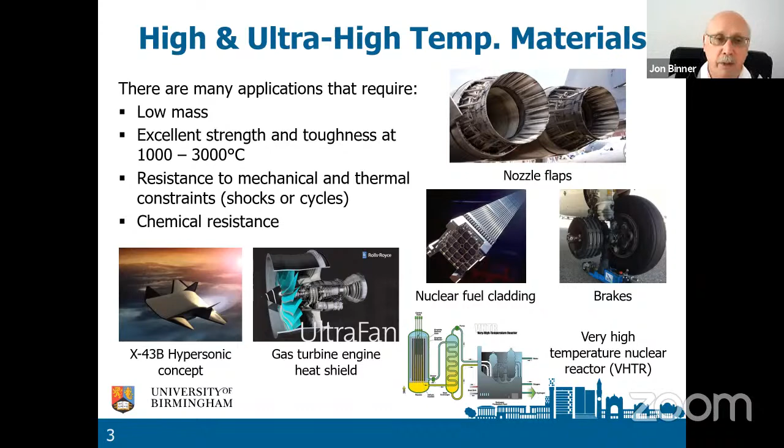So we know it's 2021, we know that some materials already exist. So the questions that need answers are: is it going to be possible to take existing materials and then improve them so that we get the right strength and toughness and resistance to oxidation and so forth at these high and ultra high temperatures? Or do we need to develop completely new materials? So that's the first question.

When we've answered that question, we need to ask ourselves the second question. Can we make components? And if we can, is their behavior representative of the inherent material properties? It's one thing to make a piece of ceramic or material in the laboratory that measures 1 or 2 centimeters in size; it can be quite different to make a full component. Can we get the properties that we can get in the small lab size samples? Can we achieve those same properties in the components?

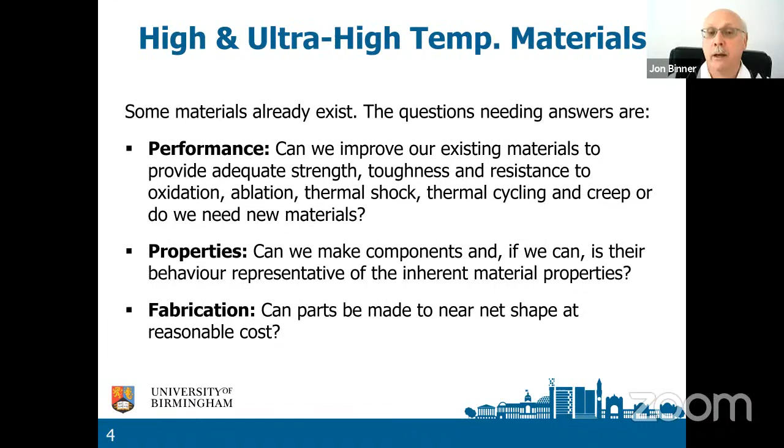And then the third question, and this is a question we need to consider all the way through the research: can we make parts at a reasonable cost? There is no advantage in having the most fantastic material ever developed by human beings if nobody can afford to use it for anything. So we really need to make sure, as we're developing the answers to the first two questions, that we keep an eye and bear in mind, is this going to be something that can be done at reasonable cost? Will people actually use the materials at the end of the day?

Okay, so the actual talk itself is divided into 4 parts, not of equal length. In the first part, I will look at oxide CMCs, ceramic matrix composites. These are materials which are typically used to around 1000 to 1200 degrees centigrade. So these are the lowest temperature materials that we're looking at.

Then I will move on to look at the silicon carbide based ceramic matrix composites. These are capable of operating somewhere in the range of 1300 to 1500 degrees centigrade.

And then we'll finish off by having a look at the ultra high temperature ceramic matrix composites. These are intended for use at 2,500 up to 3,000 and possibly even beyond 3,000 degrees centigrade.

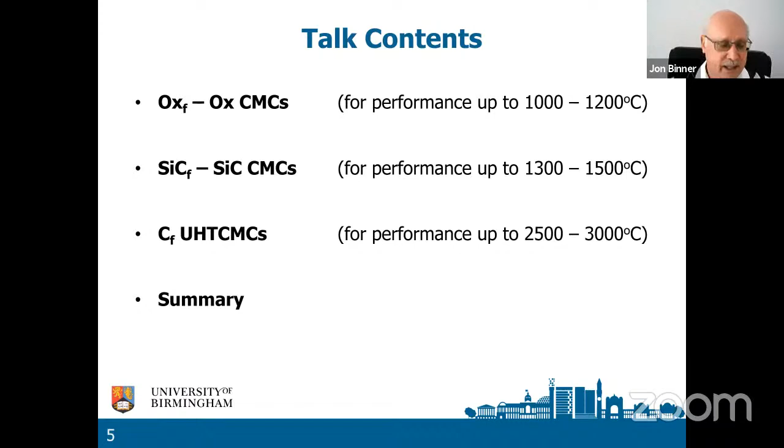You will see that there are some similarities and some differences in terms of how we go about doing things and what we do. At the end, I will provide a summary, and then we can have a session, hopefully, with some questions from you. So let's begin with the oxide composites. These are known as ox-ox composites: oxide fiber with an oxide matrix.

We have a number of projects currently in my team which are focused on these materials. Our focus is on how to make them, the processing of the CMCs. You'll see that that is pretty much our focus with all of the work we are doing. We are a team who very much focus on how to make the materials.

We're also looking very much to develop multifunctional properties, and we're looking at these with a number of different partners, different projects with different partners. In the UK, these partners are Rolls-Royce, BAE Systems, and DSTL. DSTL is the Defence Science and Technology Laboratory, and it's part of the military.

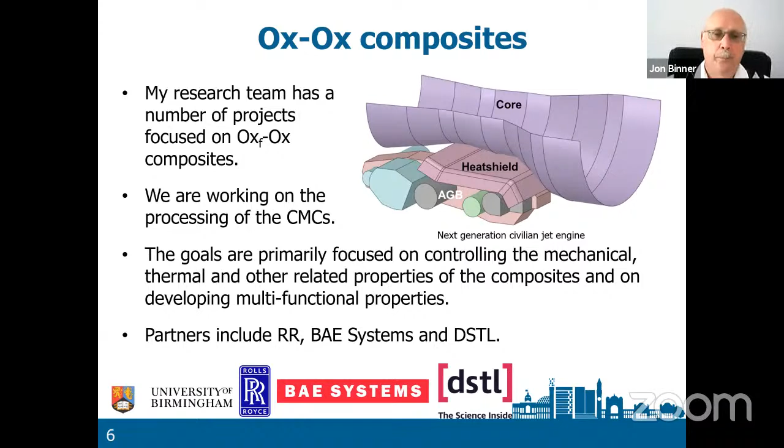Before we go any further, I really want to make one thing clear to you, and that is there are different types of ceramic matrix composite. These different types come about from the different mechanisms we use to achieve the toughening effect that we get in these continuous fiber ceramic matrix composites.

One thing we can do is put a fiber coating on the fibers. What that does is create a weak interface between the fibers and the matrix, and these are known as weak interface CMCs. It's one way of making CMCs, and it's actually the preferred way of making CMCs. You get the CMCs that are strong and tough, and that's exactly what we want.

However, it's not possible to do that with every CMC system. So an alternative approach is you create a very porous matrix, and that gives you a weak matrix. Again, you get the toughening effect, but now the composite is much weaker. So you have a tough but weak composite, which is less desirable than the weak interface where you have a tough and strong composite. But those are the two primary approaches, so you will hear me talking about weak interface composites and weak matrix composites.

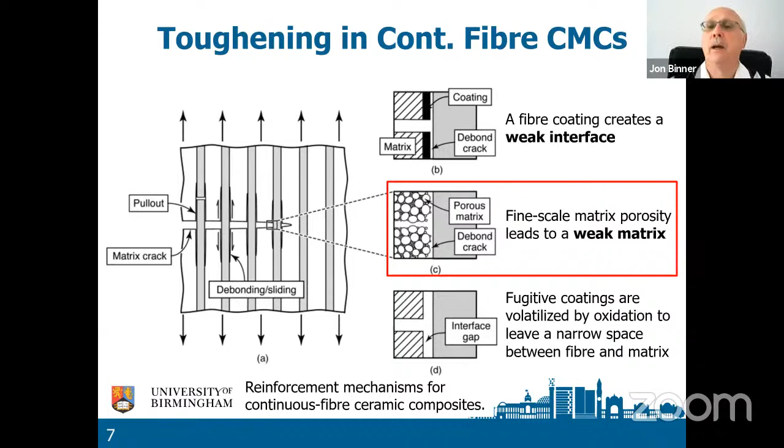For the oxide-oxide composites we are talking about, these are weak matrix composites. So we're going to focus for the next few slides on weak matrix, oxide-oxide systems. The goal here is to make ceramic matrix composites based on alumina or another oxide, mainly on alumina fibers with a porous alumina or another oxide matrix. So they are oxide fiber, oxide matrix composites, and most of our work and most of the work in the world is based on alumina.

What we are looking at is several different processing routes. There's more than one way to achieve that, so we are looking at different routes and working out their advantages and disadvantages, so we can work out for each different application which is the best route to use. The key requirements are how easy it is to form the shape, how homogeneous is the product, what is the final density. Remember, these are weak matrix composites, so we want a low final density. And then the final properties: how tough are they, how strong are they, and so forth.

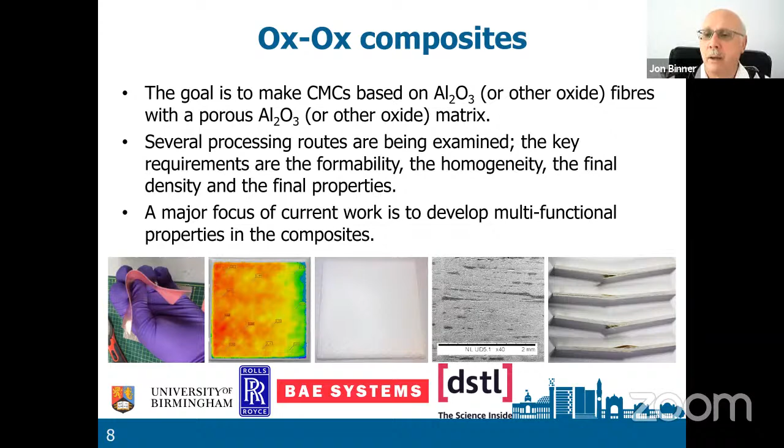Recently, at the end of last year, we started a major new program funded by the European Commission as part of its Horizon 2020 program. It's led by the University of Pisa in Italy and involves 13 academic and industrial partners from a number of countries. The University of Birmingham is involved. The key goal is to learn how to reduce the costs for making ceramic matrix composite components and their use in energy-intensive sectors such as steelmaking - we're using these to try and improve the energy performance of other industries.

The majority of the work going on is on silicon carbide composites, but our role at the University of Birmingham is slightly different. We are investigating oxide-oxide CMCs, and in particular, what we're looking at is the potential to actually make weak interface oxide-oxide composites.

I said earlier, the oxide-oxides are generally weak matrix, and there is a reason for that. Back nearly 25, 30 years ago, in the 1990s, oxide-oxide composites started to be developed. People were unable to make weak interface oxide-oxide, so they developed the weak matrix. What we are saying is that's fine, but that was 25 years ago. Maybe there are some ideas out there now which didn't exist in the 1990s that allow us to think we might be able to achieve what has been regarded as impossible - to create good weak interface ox-ox composites. So that's our target.

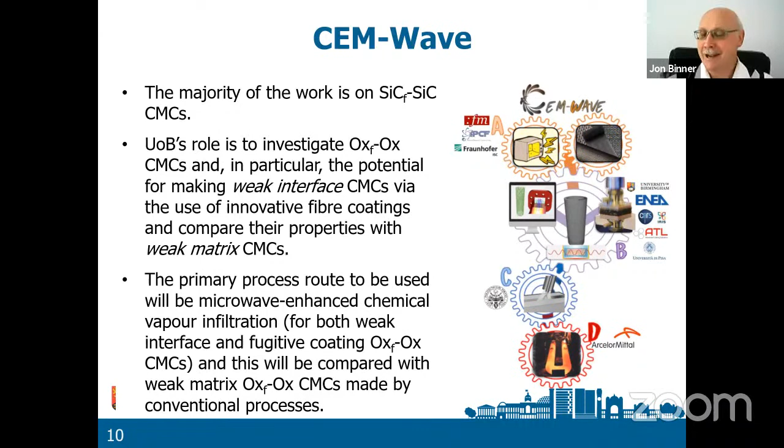So by the end of the program, which is 4 years long, we should have a very good idea that either, no, you still cannot make weak interface CMCs, or yes, you can. Here are the properties, and this is one way of making them.

Okay, so that's all I wanted to say about oxide-oxide composites. Obviously, I've got 3 different types of composites to get through, so that finishes off the work on oxide-oxide. Now we are turning our attention to the higher temperature materials - the SiC-SiC composites, silicon carbide-based composites, and also the ultra-high temperature CMCs, known as UHT CMCs.

With both of these types of CMC, you can have at least 3 different approaches. You can use stacked layers of fiber fabric, that's 2-dimensional or 2D. You can take those stacked layers and needle them - that's when you push a needle through the layers, and it picks up individual fibers and pulls them from one layer to the next. So you end up with something in the Z direction.

The stacked 2D are all in the XY plane, while the needled have a small amount of fibers in the Z direction. And then you've got the truly woven 3D fiber preforms. The stacked 2D are the cheapest, the needled are a little bit more expensive, and the woven 3D are a lot more expensive.

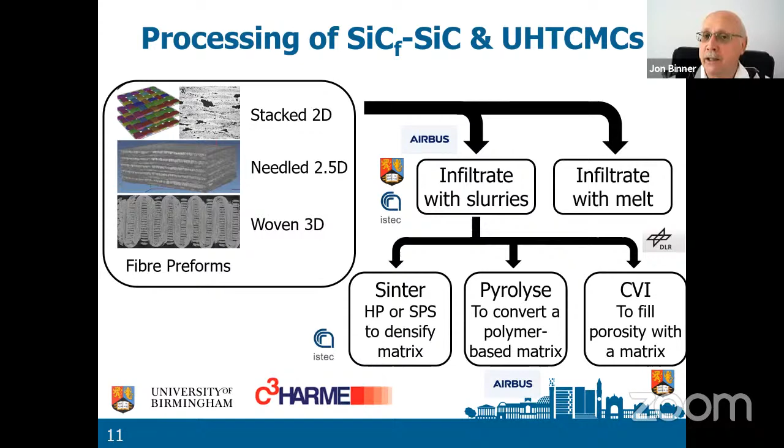But the same concepts and exactly the same processing techniques can also be used to make SiC-SiC composites. So we've got the three different types: the 2D, the 2.5D, and the woven 3D.

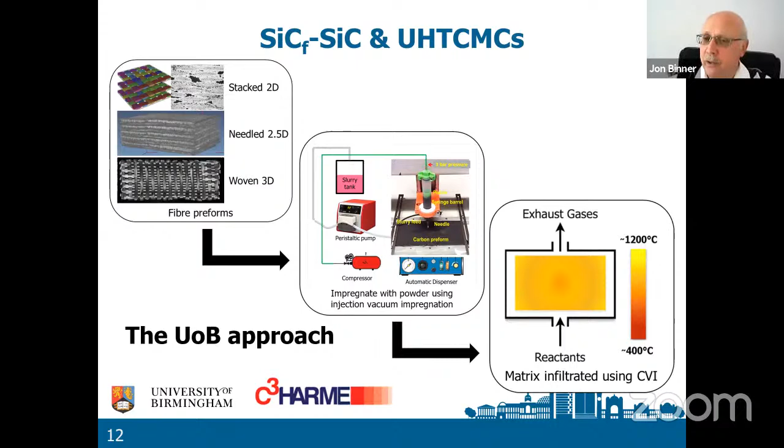Then if you want to impregnate with a slurry, we developed at Birmingham a process known as injection vacuum impregnation. I will describe that process to you a bit later on in this talk. And then you use your chemical vapor infiltration, which I will also explain a little later in the talk. In fact, here it is.

Chemical vapor infiltration is a process in which a solid matrix is deposited in a porous preform by the thermal decomposition of a reactive gas mixture. So you pass a gas at high temperature through a fiber preform, the gas breaks down and deposits a solid. You can see three different chemical reactions there.

Methane breaks down to give you carbon. A rather nasty gas called methyl trichlorosilane breaks down to give you silicon carbide. And zirconium chloride, together with boron chloride, breaks down to give you zirconium diboride. There are many, many other chemical reactions that will also work.

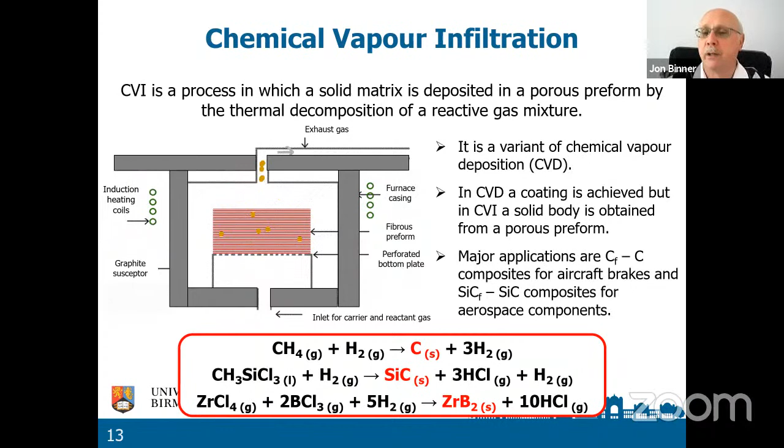The process is a variant of chemical vapor deposition, which more people have heard about. In CVD, you get a coating, but in CVI, you get a solid body from a porous preform. CVI is a commercial process — it's how carbon-carbon brakes are made for commercial aircraft. This is the process by which aircraft brakes are made, and also aerospace components are made out of SiC-SiC composites using the same basic process.

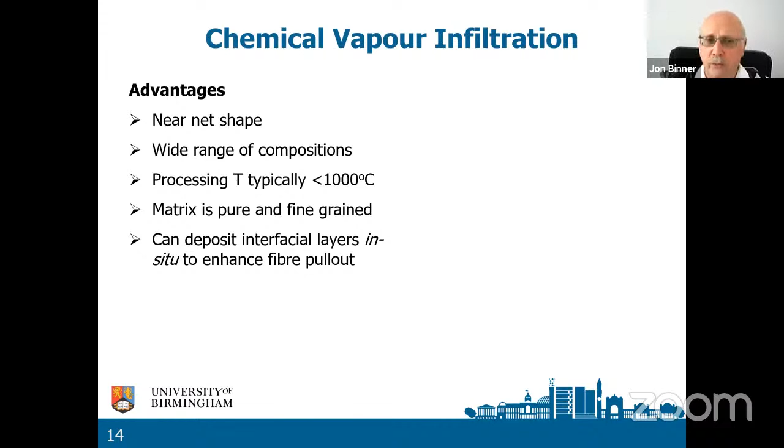The advantage is it's a near net shape process. There's a wide range of compositions. The best part is that the processing temperature is typically less than 1,000 degrees centigrade, meaning you don't risk damaging the fibers. The matrix is pure and fine grained, and in situ, in the process itself, you can put different gases through — so you can start by depositing an interfacial layer, then change the gas and deposit a different matrix. These are all very good advantages.

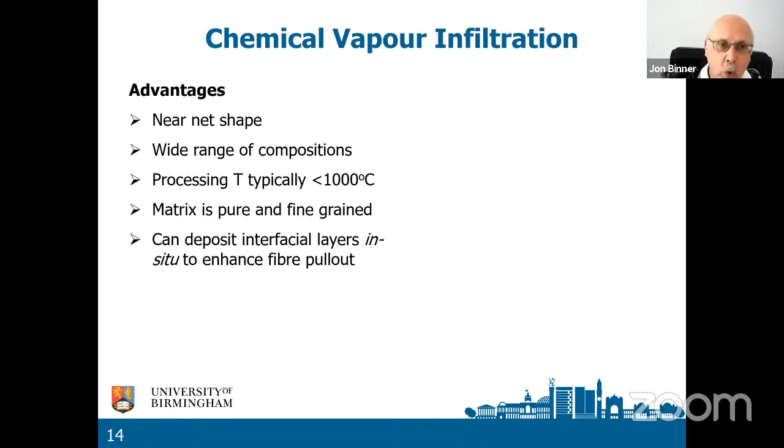There are some disadvantages. The conventional process — isothermal, meaning same temperature, and isobaric, meaning same pressure — is very slow. What do we mean by very slow? We mean that making each component can take about 1,000 hours, which is about 3 months of processing time.

That is slow. Now, you don't make your components one at a time — you have a very big chamber, and there you can make a large number of components at the same time. But it is still slow.

Why is it slow? If you look at the little diagram, the sample is the thing that's red, and the color is deeper in the middle — in other words, it is hottest at the surface and coolest in the middle. So when you pass your gases through, they tend to break down and deposit on the surface, and this blocks off the channels, the pores that lead the gases to the center of the body.

So after a number of hours of processing, you stop the process, take all the parts out, machine the surface, then put the parts back in and reheat the whole thing. Heating has to be very slow because we want to minimize temperature gradients. Then you go through the whole process again, and you might have to do the machining stage two or three times. So the whole process can easily take 1,000 hours, or about 3 months.

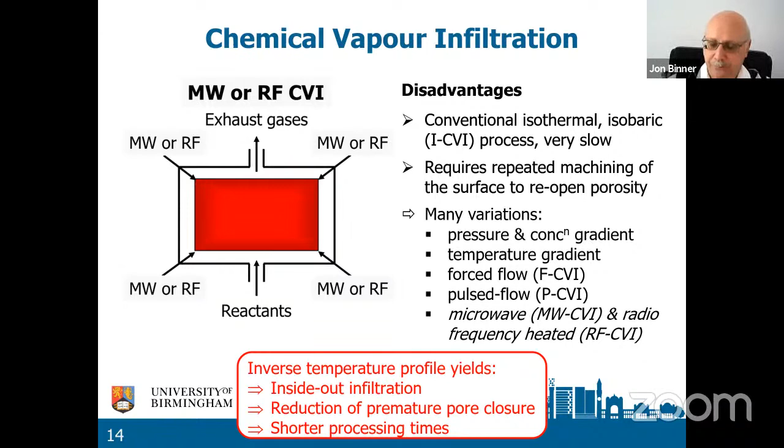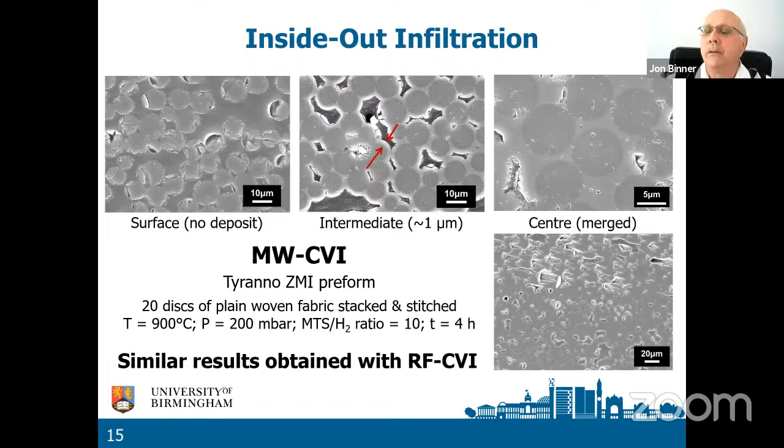So this enables us to cook from the inside out. We can avoid all those machining stages. We get much faster processing. And we can see the deposition profile here.

So this is silicon carbide fibers with silicon carbide powder and a silicon carbide matrix. What we are doing is taking the fiber preforms, infiltrating them with powder, and now depositing the matrix. You can see when we heat it at 900 degrees centigrade, we get a nice inverse temperature profile in the middle, that's the area circled in red.

At 950, that profile is larger, and by 1000, we've completely cooked the entire sample. Ignore the ends with the green circles.

This is because we painted the ends of the samples with a silicon carbide slurry, and that was because we were getting electrical discharges where an individual silicon carbide fiber poked out of the edge of the sample. We built up the electric field in the microwave, and then just like lightning strikes, we got discharges. We found by painting the ends of the sample, we could avoid that.

So ignore the bits in green, it's the bits in red. Again, what you can see here is that you do indeed develop the inverse temperature profile. So it's nice to see that the theory actually is matched by experimental practice.

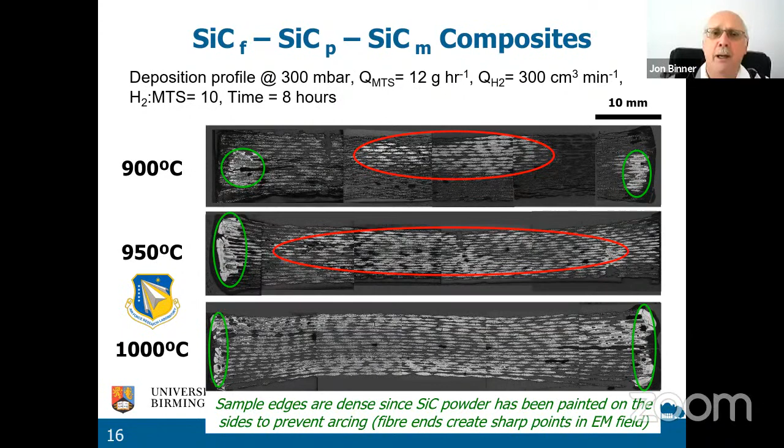You can see here, these are the samples at 1000 degrees centigrade. The time is 8 hours. The center line is at 0 millimeters, and there's very little deposition. But as you move towards the surface, you get more and more deposition. So again, we're able to see from our samples that this whole inverse temperature profile works very, very nicely.

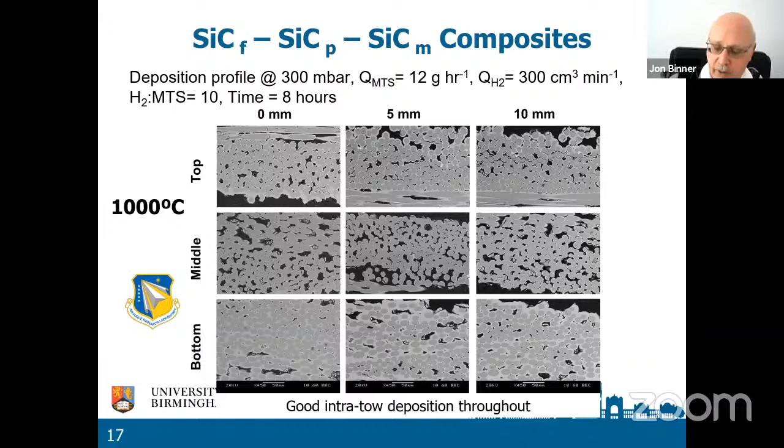And then we can check the rates. On this plot, on the left-hand axis, you have got the mass gain rate, and the bottom axis is the pressure of the system. You can't operate at very, very low pressures because you get plasma discharge. If you operate at slightly higher pressures, you encourage arcing, but anything above about 150 millibars, we can operate successfully.

And then you've got the plots at 900, which is roughly equivalent in deposition rate to conventional CVI. If you move to 950, you get faster deposition. And if you move to 1000, you get faster still. Note that data point that is circled, that's only had 5 hours rather than 8 hours. So after 8 hours of processing, we would expect it to be a little higher up that axis. That's an experiment we still need to do.

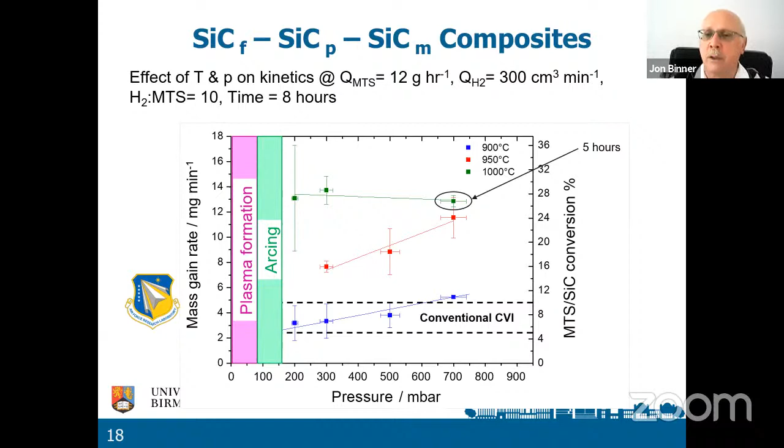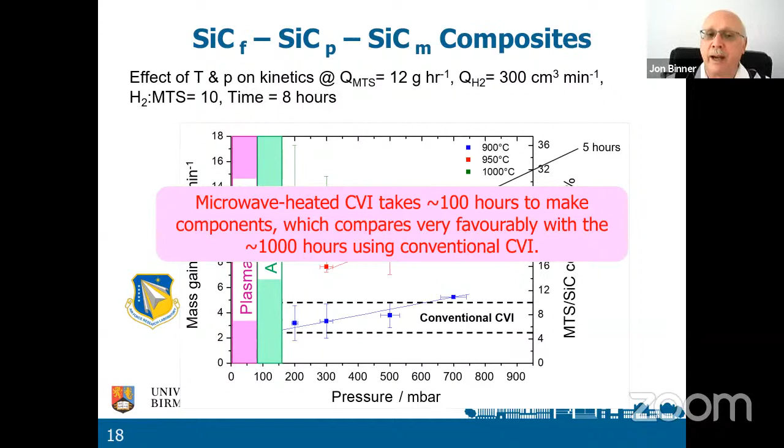So microwave heated CVI takes about 100 hours to make components. That compares very favorably with the approximately 1,000 hours using conventional CVI. So we've speeded the process up by a factor of about 10.

Most recently, we started a new program on using microwave CVI to produce hollow silicon carbide tubes, and this is for nuclear fuel cladding. So we wind our own tubes, as you can see in that top image, and our partner is the National Nuclear Lab. We've got funding from the UK's Department for Business, Energy and Industrial Strategy, known as BEIS. It's part of a bigger program involving other universities, as you can see from that bullet point, the bottom bullet point. But what we're working on is saying, well, so far we've only made discs or plates of material.

Can you actually make a hollow tube? The answer is yes, you can. We haven't finished the work yet, it's still ongoing. But you can see how with deposition time, after just 20 hours the density is going up very nicely. You can see the estimated time to different densities depending on whether we're getting 0.1 grams per hour or 0.05 grams per hour. Since we know we can get 0.1, we're going to be 40 or 50 hours to make these samples. That's a long time, but it's a lot better than 1,000 hours.

That concludes what I wanted to say about SiC composites. We're roughly halfway through the talk, so I wanted to spend the rest of the time talking about ultra-high temperature materials. These are materials needed to withstand really very high heat fluxes over very small areas, so you're going to get very high temperatures, oxidation and erosion, and very, very high temperature gradients.

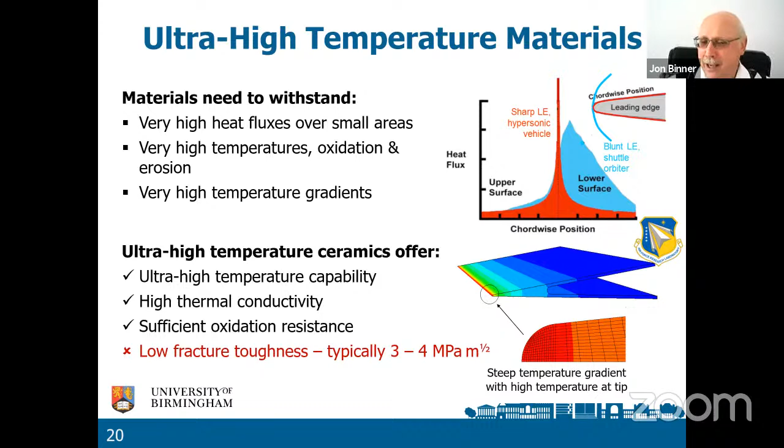So the materials we're looking at are ultra high temperature ceramics. They have the ultra high temperature capability, a high thermal conductivity which is very good because it helps dissipate the heat, and adequate, sufficient oxidation resistance - it would be better if that was better, but it's okay. The big disadvantage of these materials is they have a very low fracture toughness, 3 or 4 megapascal meters to the half. That's about the same as alumina, and that's just not good enough.

This is some work done in Italy, a few years ago now - this is 10 or 15 years old. They made a nose cone for a rocket, at the tip - just that little silvery bit right at the tip in that top image - made of zirconium diboride containing silicon carbide. Then it was tested. If you look closely at the time, 15, 12, and 57 seconds, within a second that whole nose had completely failed. So it didn't survive a single second.

So that tells us that these monolithic ceramics, not the composites but the straight ceramic material, simply cannot cope with the temperature gradients that are generated.

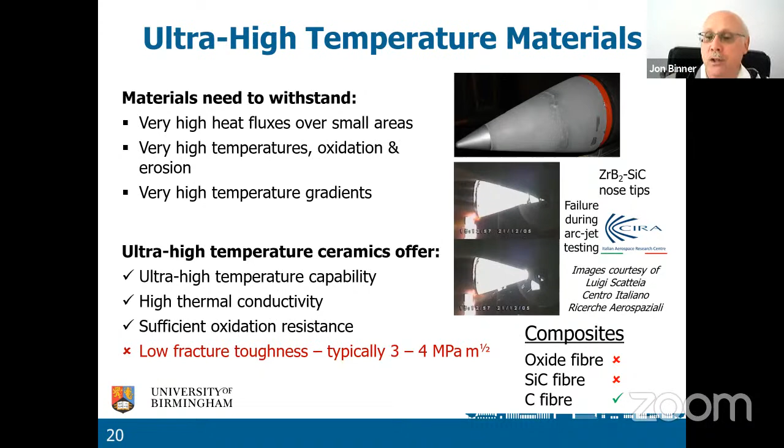So the solution is to use composites. We can't use oxide fibers - they won't survive more than about 1,000 or 1,200 degrees. We can't really use silicon carbide fibers - they won't withstand more than 1,400 or 1,500. We can use carbon fibers, but they oxidize readily, so we've got to protect them from oxidation.

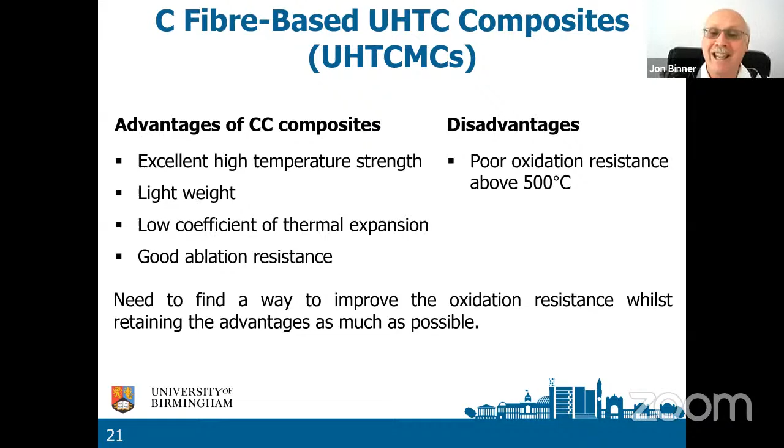So the carbon-carbon composite has excellent high temperature strength. It is very lightweight, has a lovely low coefficient of thermal expansion, and excellent ablation resistance, but it has extremely poor oxidation resistance above 500. And we want to heat these materials to 2,500 or 3,000 in air, so we need to find a way to improve the oxidation resistance.

But let's just have a little look at the slurry impregnation stage. This is something that we developed at the University of Birmingham.

Originally in the laboratory, we used vacuum impregnation, and it worked extremely well for small samples. But as soon as we started to make our samples bigger, we found that vacuum impregnation didn't work. You got that very shallow depth of penetration. These are X-ray micro-CT, micro-computed tomography images, and you can see how only the surface layers have got the material deposited.

So we needed to find a new approach. We developed the injection vacuum impregnation, which we know as IVI. You take a syringe full of your slurry, plunge the syringe into your preform, and then as you withdraw the syringe, you squeeze the slurry into your preform. So now you're able to fill the preform from the inside with your slurry. And it works beautifully.

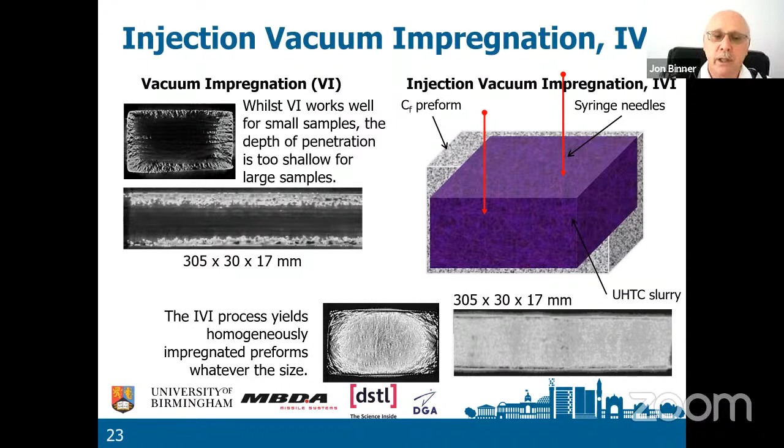You can get very, very homogeneously impregnated preforms, and it doesn't matter what the size is. You can have a look at these things, and we shall see shortly, and you can make really large plates. The other big advantage is you use less processing steps.

With the old vacuum impregnation, you needed 8 different processing steps, and you can see the mass change there with each processing step. First PYR is first pyrolysis, and then second pyrolysis. The red shows the IVI approach. It takes just 3 processing steps: injection, impregnation, pyrolysis, and you've finished. You end up with something which is much denser, it's taken many less processing steps, so it's a much, much better route.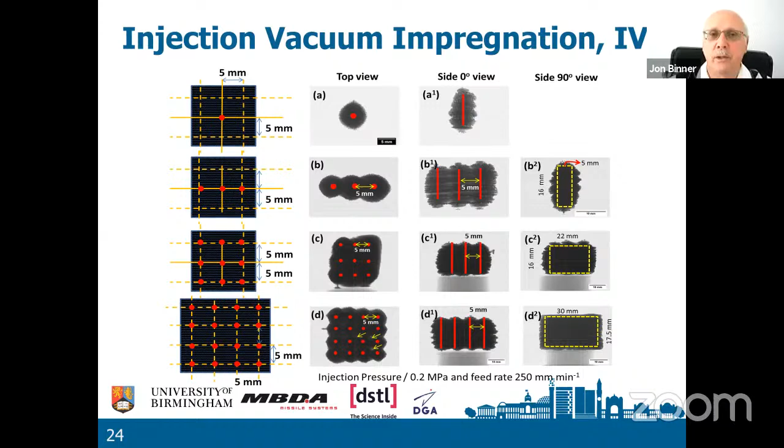Since we did this work, we've had an entire PhD work on this to really understand the process and the science behind it. We can use an automated system. The injection was initially done by the student or researcher injecting, and they ended up with a thumb that was really quite tired by the time they'd finished injecting a large plate. So we moved the whole thing onto an automated system.

So we've got there an XY plotter. It moves the needle and the syringe about, and then you apply the pressure with a peristaltic pump, and you squeeze down and deposit an exact amount of slurry exactly where you want to put it in the preform. And so we learned that you apply an approach like this, where you start at the middle, you deposit at the middle, and then you work your way towards the outside. And there you can see the injection pattern for one sample.

And then here you've got some samples. You can see the dimensions. Hopefully you can see that the black is not absolutely uniform. In the smaller sample, the black is pretty uniform. In the larger sample, hopefully you can see in the top right-hand corner and in the bottom right-hand corner, it's a slightly different shade of black — a bit lighter grey. That's where it hadn't completely impregnated.

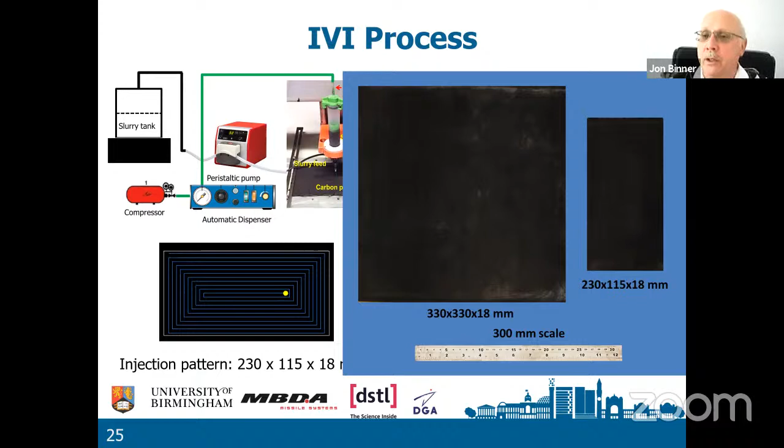But nevertheless, that is part of the learning curve, and we can now produce samples that are almost any size, any thickness, and we can get a very, very homogeneous powder dispersion within them with this technique. And of course, this whole concept of injection-based processing is applicable to far more than just making ceramic matrix composites.

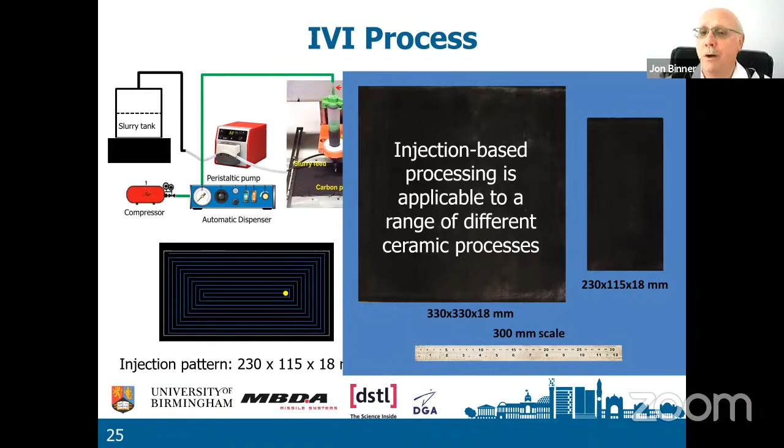Okay, so we've seen this slide before. We've done the slurry impregnation, we dry everything out, we cure the resin that's in there, we pyrolyze the resin, and that gives us some carbon. And then we use the CVI system to deposit the rest of the carbon matrix.

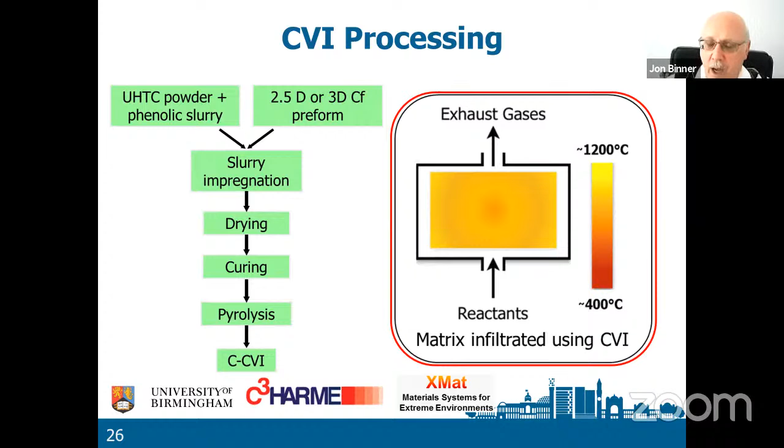We use RF processing now, not microwave, because we are using carbon fibers, and carbon fibers absorb RF. Silicon carbide fibers absorb microwaves. So the different frequency, different wavelength applies to different materials.

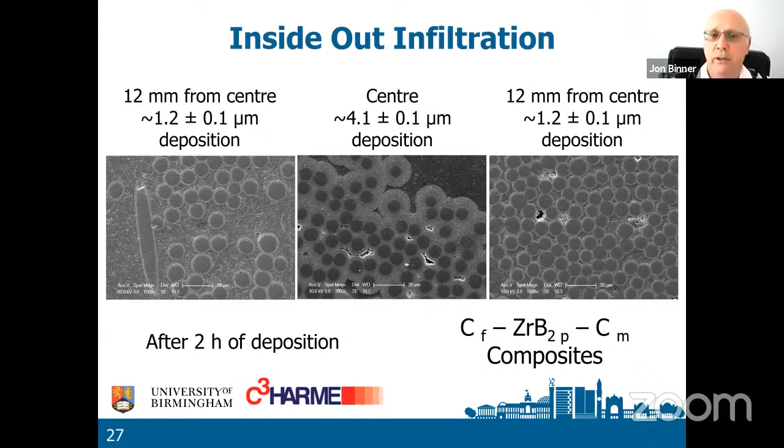And again, you can see here the inside-out infiltration. So you've got the center one there, and you've got about 4 microns of deposition — this is after just 2 hours of depositing. 12 millimeters from the center in either direction, and you've deposited about 1.2 microns of deposit. So again, nice clear evidence that we are getting our inverse temperature profile.

Okay, so then we make the composites. This is a 2.5D preform. Remember, this is stacked layers of fabric, and then you needle them going through, and the needle goes down, gets hold of some fibers from the layer below and pulls them back to the layer above. And so we've got something in the Z direction.

We found we can get very uniform RF heating, which is excellent. And we found that after just 21 hours of infiltration, we can get 10 volume percent porosity, so it's 90% dense. With conventional CVI, to get 10 or 11% porosity, 89–90% dense, as we have said, you're looking at about 1,000 hours. So in this case, it's now roughly 50 times faster.

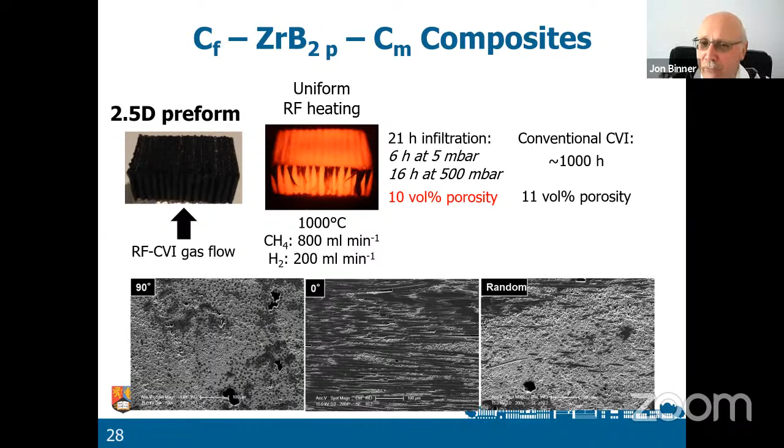With 3D preforms, it's a little different. 3D is slower. After 16 hours of infiltration, we still have 30% porosity, so it's only 70% dense. The reason is that the gas permeability for the 3D preforms is much lower than for the 2.5D preforms. And if we can't get the gas to flow through the sample, we're not going to be able to deposit the matrix.

We've also focused on scaling up. A lot of our work was done at the beginning on quite small samples, 50 millimeters, but we did a lot of work, including modeling of the whole RF process. So we could go from 50 to 100, and then we want to get to 200, and then to 280 millimeters.

All of this work should have been finished a year or more ago, but the pandemic closed our labs for several months. Now we're operating again - we have been since about September, but with reduced numbers of students in each laboratory. So each researcher is typically getting about 2 or 3 days a week in the lab, because we're only allowed 2 people in a lab at a given time. And so it has delayed our whole process by at least a year. Hopefully the new system will be operational this summer.

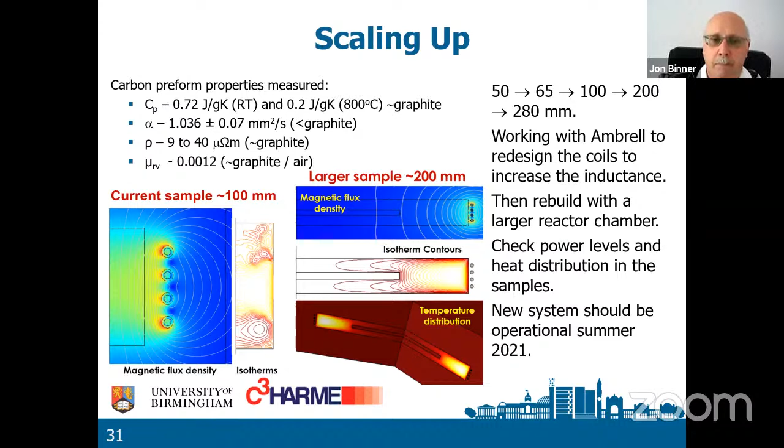We've also done some work on depositing not just a carbon matrix, but actually a zirconium diboride matrix. So we flow a mixture of boron chloride and zirconium chloride in an argon carrier gas through the system. You can see the RF system there - it's a simple tube with a coil around it, heats the sample up, deposits the material. There on the top right you've got the equation, and the question is, does it work? And the answer is, yes it does.

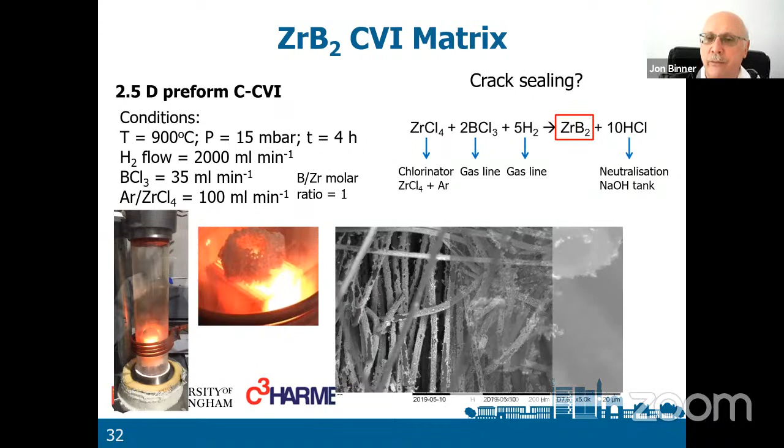So here is just after the first hour or so of deposition. You've got the fibers, and you can see the deposits starting to occur on the surface. If we zoom in a bit, you can see the fibers are quite nicely coated in the deposit. And when we analyze that, we find yes, it is zirconium diboride. The idea here is that in use, if you have any cracks, the zirconium diboride will oxidize to zirconia, and hopefully that will seal the cracks.

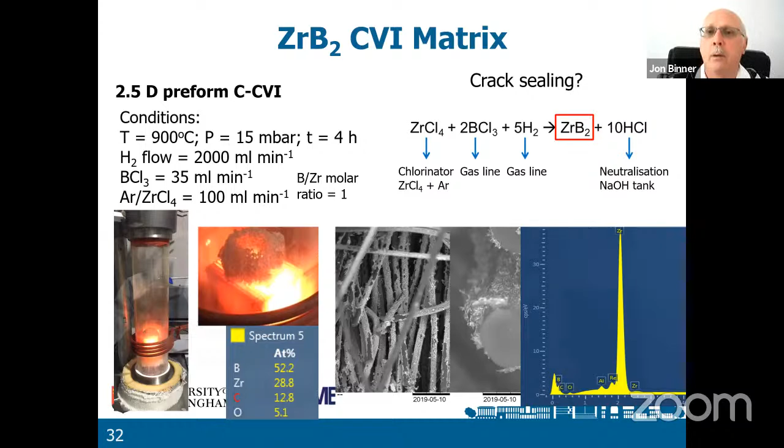So the idea here is to see if we can achieve some crack sealing, and therefore get even better materials. So the RF CVI process has a number of advantages: it yields a good microstructure, it's a low temperature process, there's no damage to the fibers, and it's possible to deposit fiber coatings or change the matrix by changing the process gas. But it has some disadvantages.

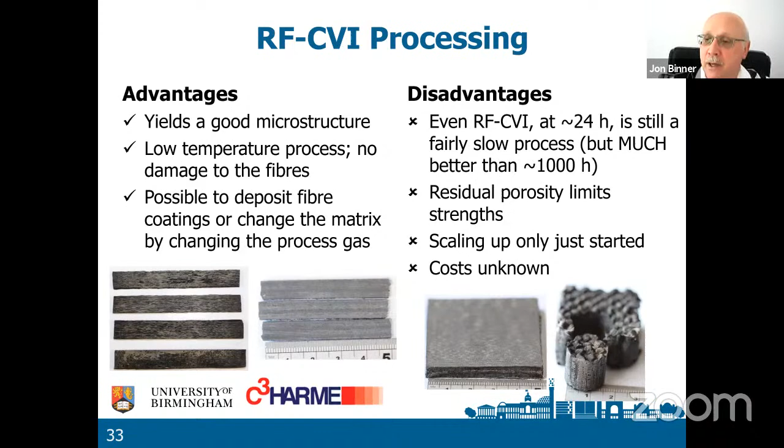At 24 hours, it's still a fairly slow process. Residual porosity does limit the strength - with CVI, you won't get much more than 90% dense. Scaling up has only just started, and of course, costs are unknown.

So very quickly, because I know I'm running out of time, looking at the silicon carbide composites - when we put the silicon carbide powder in there, what we're effectively doing is filling up the void.

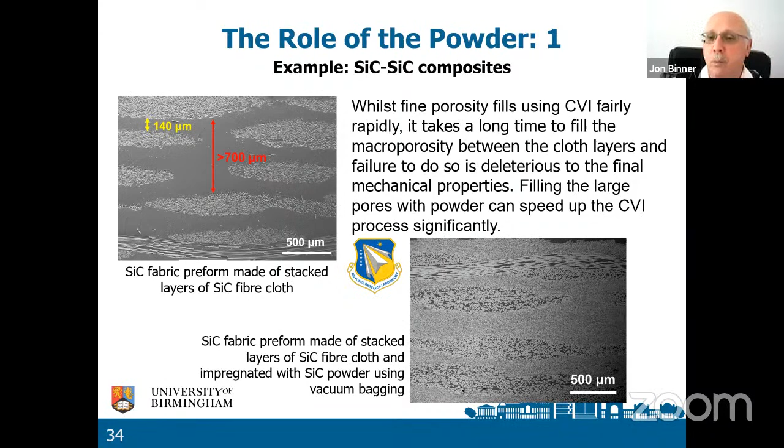So that top left figure, you've got quite large voids. This is a micro CT, up to 700 microns in size, and that's quite a big void. We can fill them with the powder, so that helps nicely.

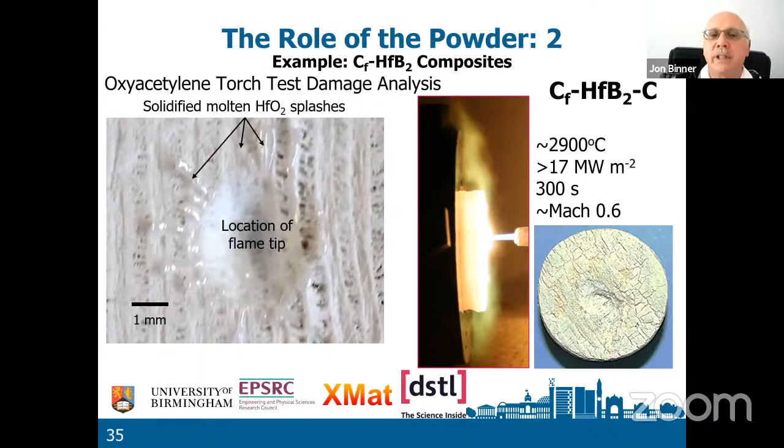In the carbon fiber ultra high temperature ceramic system, it's quite different. Here is a material being tested - I'll explain more about the testing shortly. This is an oxyacetylene torch, and there's the location of the flame tip. You can see some solidified material that used to be molten hafnia.

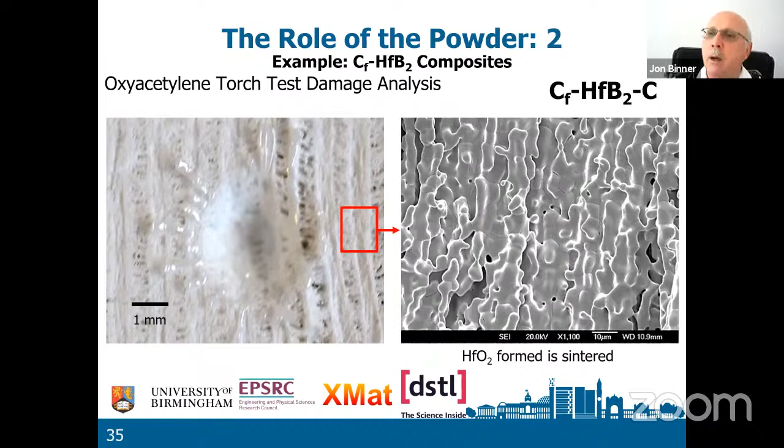And then if we look down the hole itself, you can see here some regions, gray regions. They are actually formerly molten hafnia. So we know we're above the melting point of hafnia.

And if we zoom in, you can actually see we have a non-wetting situation. So our what was molten hafnia has formed droplets, and they are not wetting the carbon fibers. So we've got partial wetting. We think we can improve the performance if we achieve better wetting of the carbon fibers.

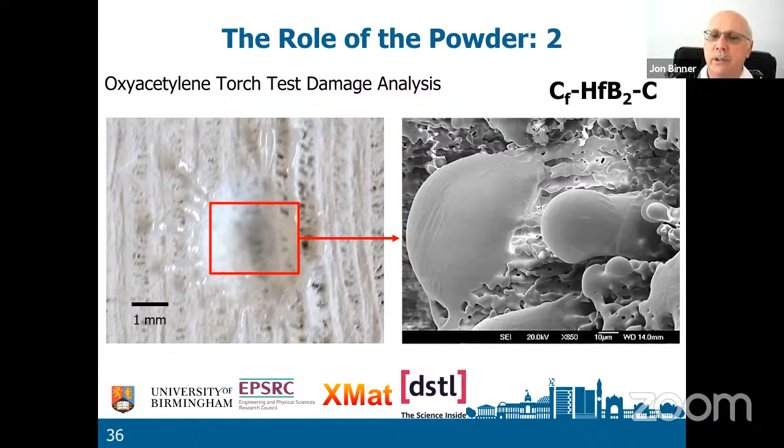And if we zoom in even more, we can see we've got crystalline hafnia. So initially, the powder adjacent to the maximum temperature sinters and protects the fibers. However, the question was, how does the molten hafnia formed at the maximum temperature protect the fibers?

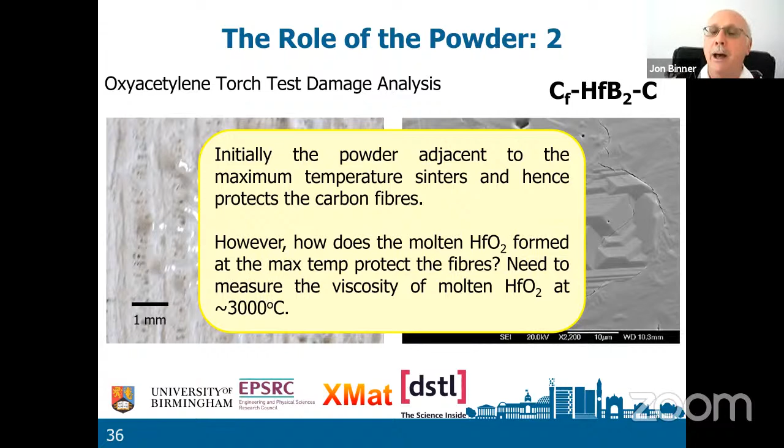To answer that, we felt we needed to measure the viscosity of molten hafnia at 3000 degrees centigrade. And we managed to find a chap, Dr. Louis Hennet. He is based at CNRS in Orléans in France, and this is exactly what he does - this is his research area. He measures the viscosity of molten materials.

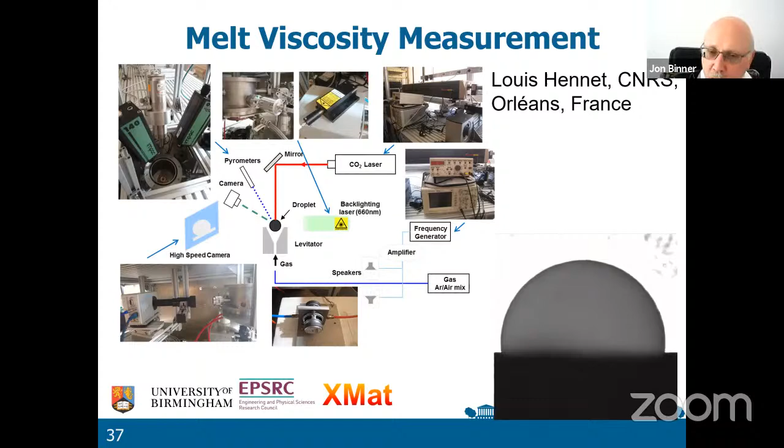This is the vibrating droplet - a droplet of molten hafnia at 3000 degrees centigrade, and then it vibrates, and then the vibration stops. If we see that again, you can see the droplet vibrates, and then the damping in the system causes it to stop. By monitoring that damping, he can get the values that he needs.

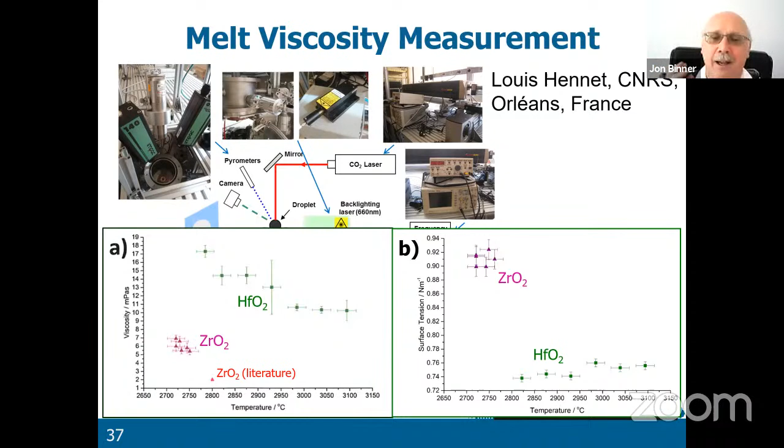So we've now got values for surface tension and viscosity. And if you look at those values, you realize that the viscosity is really low. So we are not getting protection at all from our molten oxide. These are fragile liquids. This material is not going to survive an oxyacetylene torch's gas blast at very short range. So we need to find another explanation.

So let's have a quick look at our thermoablative testing. We've tested them two ways: the oxyacetylene torch, and we also have an oxypropane torch and an arc jet tester. The oxyacetylene and oxypropane torch - this is at the University of Birmingham. We built it ourselves, so we have all the system which is set there.

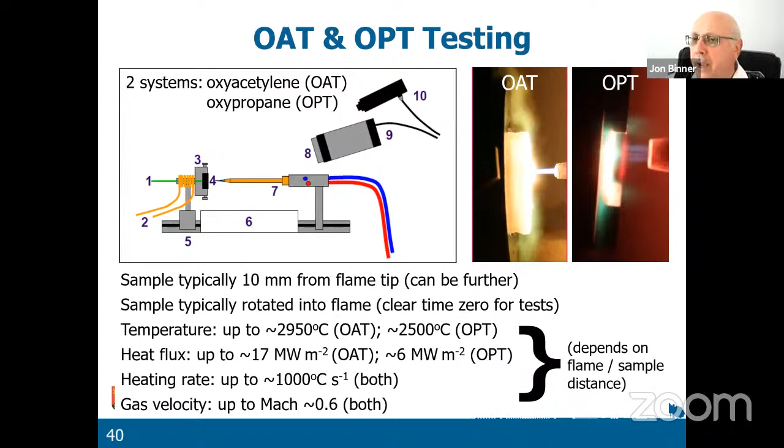The oxypropane torch is multiple flames. And this is the oxyacetylene torch test.

It's been edited. It was a 5-minute test, and we've edited it down to a few seconds. There is the sample coming in, and you can see the heating rate. We can then put a filter in and actually watch what is happening to the surface of the sample during the test. Then we allow it to cool—this is the slowest part. We typically test materials for about 5 minutes.

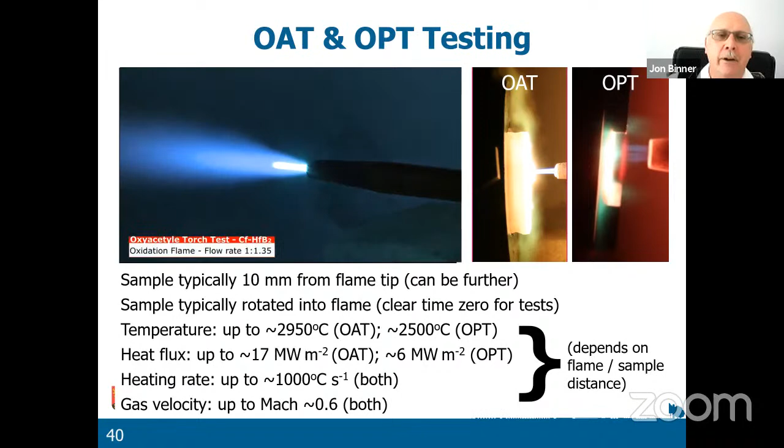We'll just watch that again. There it is, there's the sample coming in. You can see the extreme heat rate, and how close the flame is to the sample.

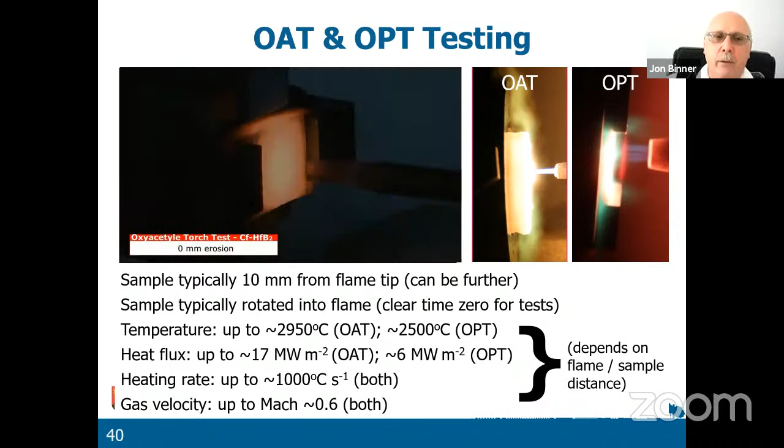And then we've edited this down. The sample at the end of the day has zero erosion. This was one of our materials we developed later in the program. There you can see a whole series of heating rates, and different materials will have different heating rates because of their different thermal conductivity.

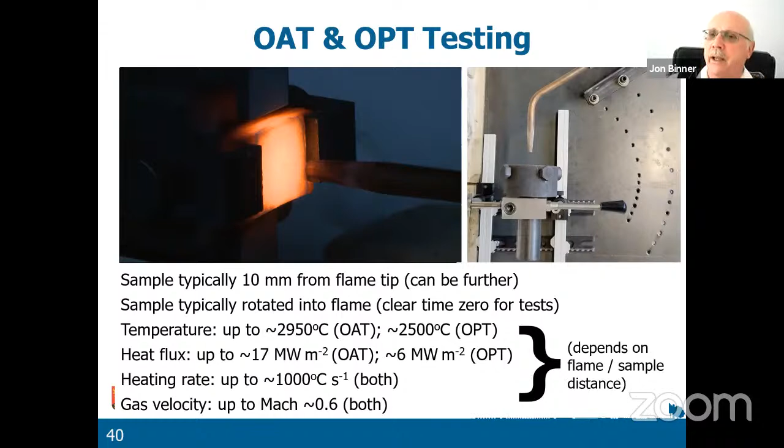We've also developed the process where we can now do it at 90 degrees, which is where we started, but also, as you can see, we can move the torch around. So now we can have angles varying from almost 0, about 5 degrees, right through to 90 degrees, so we can investigate the effects of a glancing flame on the surface.

These are some of the results. These are 2,950 degrees for 300 seconds. This was comparing the old VI process against the IVI process, and you can see the IVI samples were much better. The depth of the ablation hole was smaller and the erosion was significantly less.

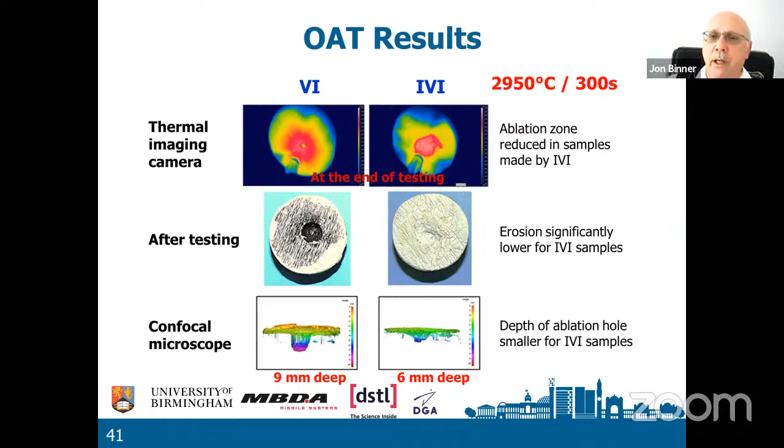A much better test and a much more expensive test is the ArcJet. We developed our systems for rapid screening—is material A better or worse than material B? When you really want the testing done and you want to get results for publishing, you really need ArcJet testing. But these tests will cost something like 25,000 euros per sample, so this is not a cheap test.

But it actually uses much larger heat fluxes. The temperatures are much the same, but the gas speed is now truly supersonic or hypersonic, so it's the most realistic test you can do. There's only a small number of systems in the world: NASA, AFRL, and DLR. Our materials have been tested at AFRL in the United States and DLR in Germany.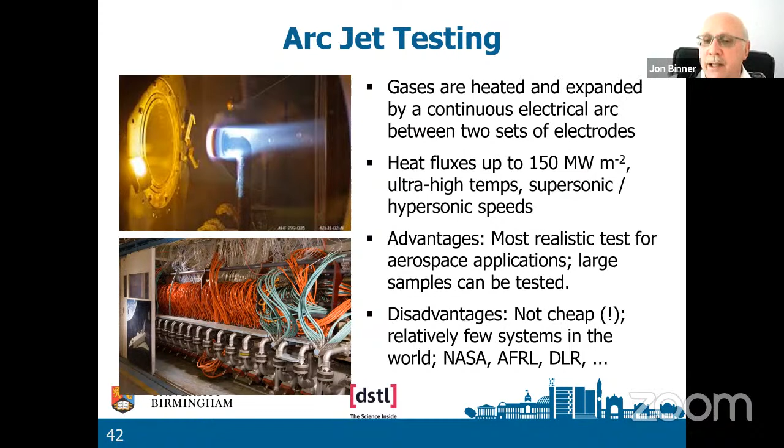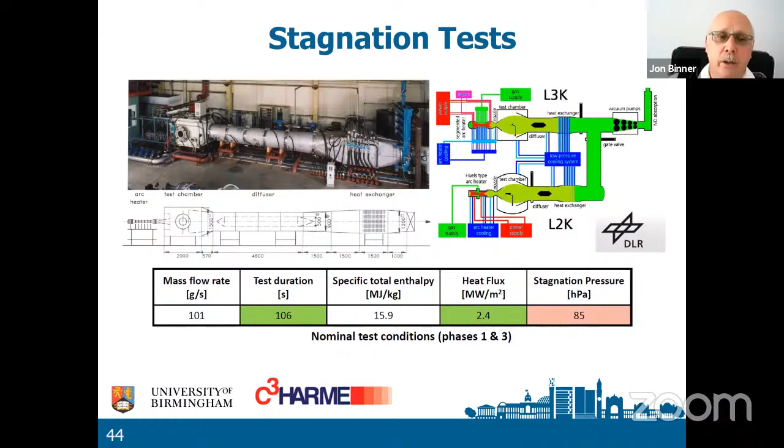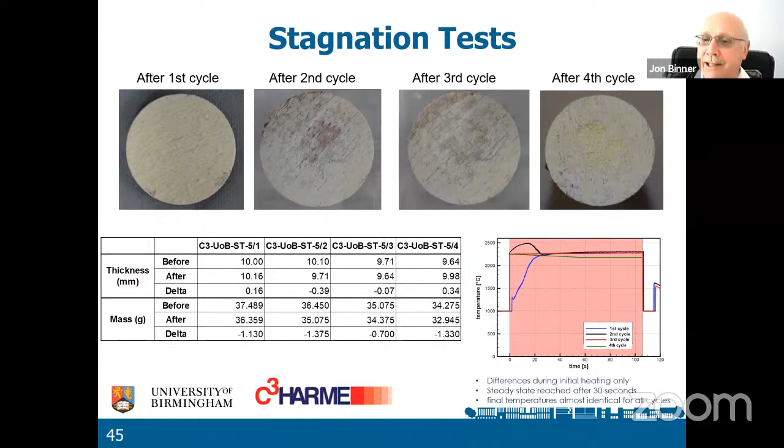And we had one sample, we tested it 4 separate times, up to the first, the second, the third, and the fourth cycle. And you can see this sample is doing fine—it's surviving 4 separate cycles here. Each time the thickness was measured, the mass was measured. What you've got there is how the temperature—that plot in the bottom right-hand corner—changes as a result of time. You can see it's really, really uniform. There's a bit of variation in the first 20 seconds, but then after the second cycle, the material settles down and it just performs beautifully.

So what do we know? We know that carbon fiber, hafnium diboride, and hafnium carbide generally outperform other systems. There are more systems you can look at. We know the hafnium carbide isn't great—it results in the front face falling off, whereas the hafnium diboride is much better.

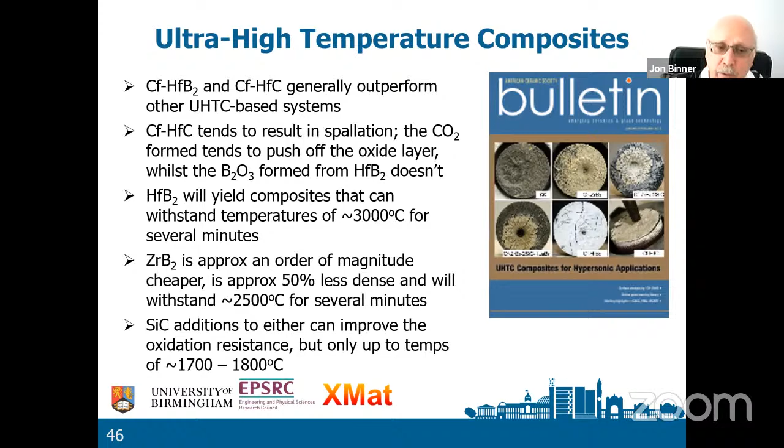We know the hafnium diboride-based composites can withstand 3,000 degrees centigrade for quite a few minutes. Zirconium diboride will go to about 2,500 degrees centigrade for many minutes. It is a lower temperature material, but it's half the mass and is a whole order of magnitude cheaper. So if you don't need the 3,000, if 2,500 will do, then you want to use zirconium diboride. Silicon carbide additions can improve the oxidation, but only up to relatively modest temperatures.

And then the final thing is just to show you an amazing discovery we made a couple of years ago. This is the amount of hafnium diboride—these are mixes of hafnium diboride and zirconium diboride. You can see these are the mass ablation rate and the linear ablation rate, so lower is better, and smaller ablation area is better.

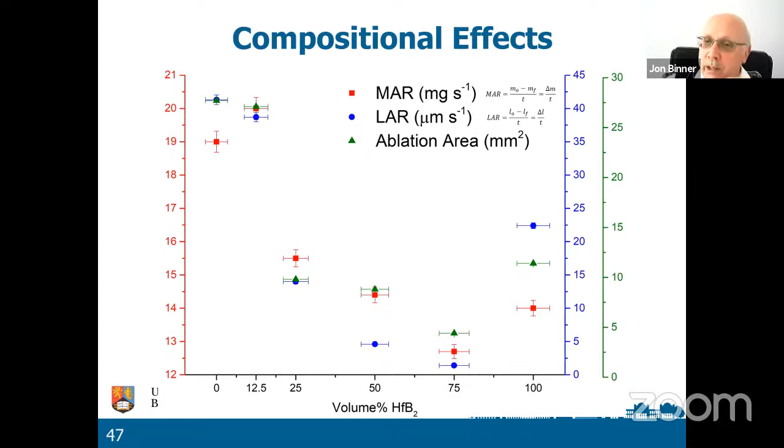You can see that if you have 100% zirconium diboride, you get quite a bit of damage. 100% hafnium diboride, you get less damage. But actually, 75% hafnium diboride, 25% zirconium diboride gives you the least damage of all. We are still working to understand why this is. We know from images that you get a different attack pattern.

And this is something we really need to understand. I was supposed to have a PhD student start in October last year. The student hasn't been particularly well, so is joining us in October this year, I hope. That PhD student will investigate what is happening here and try to come up with an explanation for why the 75% hafnium diboride composition is by far the best.

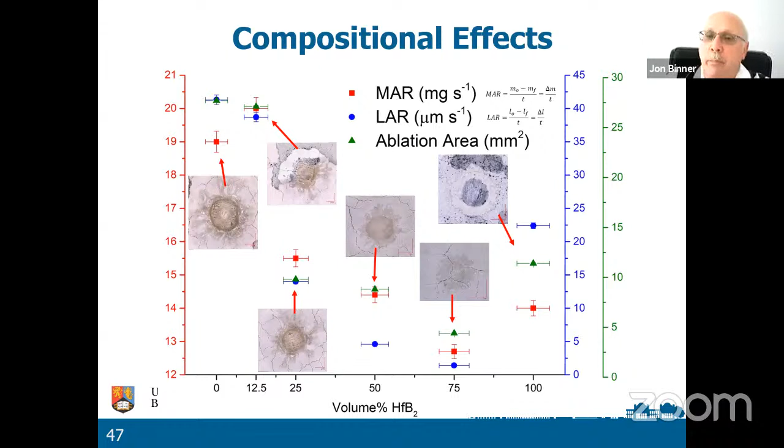You can see that's what the sample looks like, with those splashes of molten zirconia. With hafnium diboride, it's broadly similar, but with that mixture you get a different pattern, and we need to understand that pattern. Okay, so performance, we can achieve quite a bit.

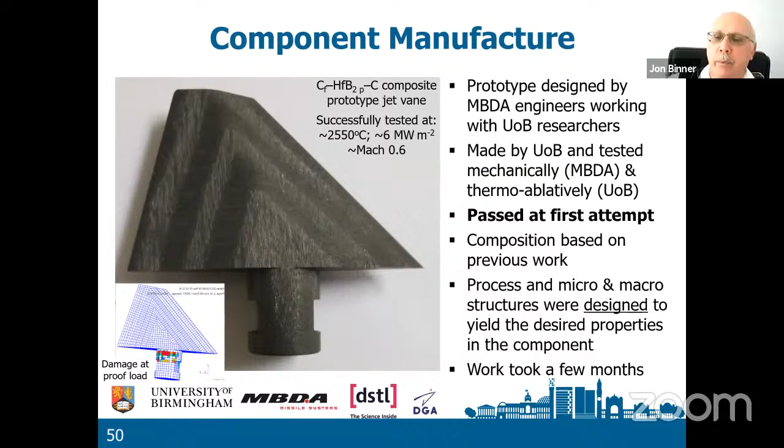Properties, the question is, can we make components? The answer is yes, we can. Here is a jet vane that we made. It was successfully tested at 2,550 degrees, 6 megawatts per meter squared, Mach 0.6, and that survived very, very happily. It was designed by MBDA engineers working with us, made by us, and at the very first attempt, it passed and was successful. We designed the micro and macro structure to yield the desired properties, and in just a few months we had made a component that was very successful.

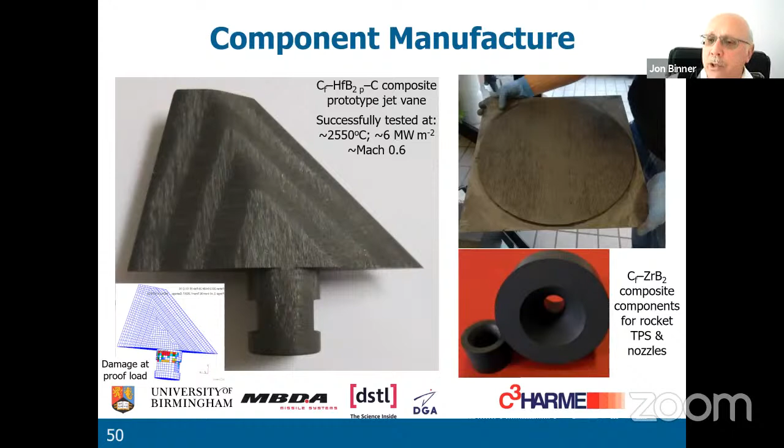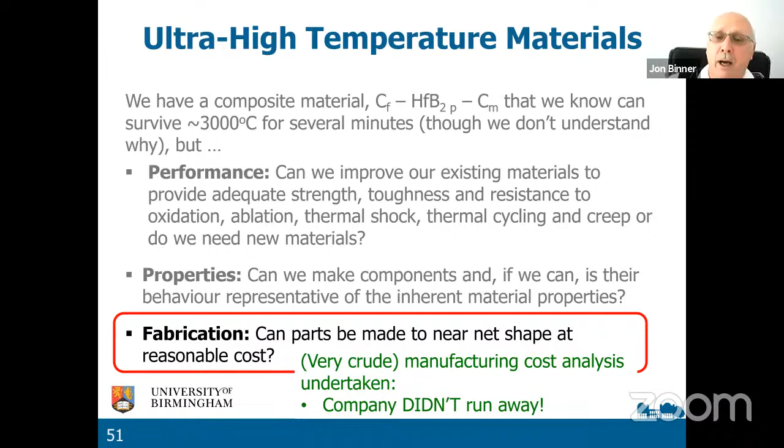In the C3HARME project, we've made very large samples, and we've also made rocket nozzles, as you can see there. And fabrication, can parts be made at reasonable cost? We did a very crude manufacturing cost analysis, and all I can say is the company didn't run away, but gave us more money. So I assume the costs they consider reasonable.

Okay, that's it. Thank you very much.

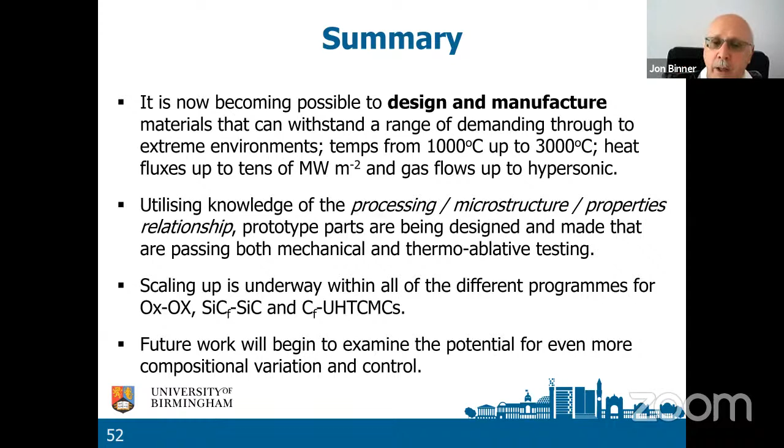It is now becoming possible to design and manufacture materials that can withstand a range of demanding environments, 1,000 up to 3,000 degrees, heat fluxes up to tens of megawatts, and gas flows up to hypersonic. For me, the key to success is utilizing our knowledge of the processing, microstructure, properties relationships. By doing so, we can design materials, make them, test them, and we are finding they are being successful. We are scaling up all of our different programs, and we hope future work will begin to examine the potential for even more compositional variation and control. Thank you very much for your attention. That concludes this presentation.